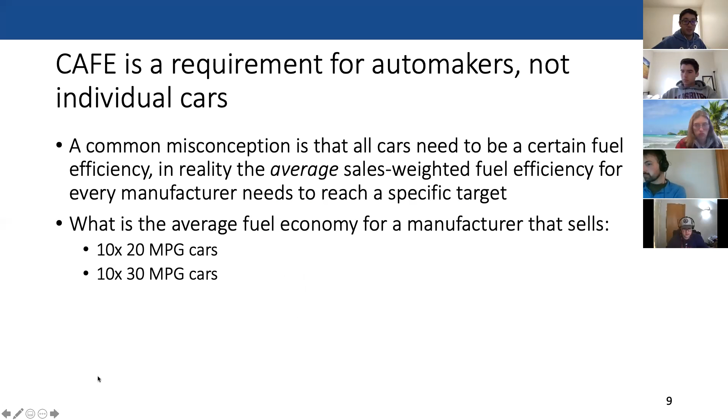Okay. So when an automaker complies with the regulation, they generate credits based on the target efficiency. Those credits can actually be banked or even traded. And so it makes some of the calculations a little bit more complex, and it makes tracking it more complex because, even if you're out of compliance, or you're over complying, that can factor into decision making processes down the line.

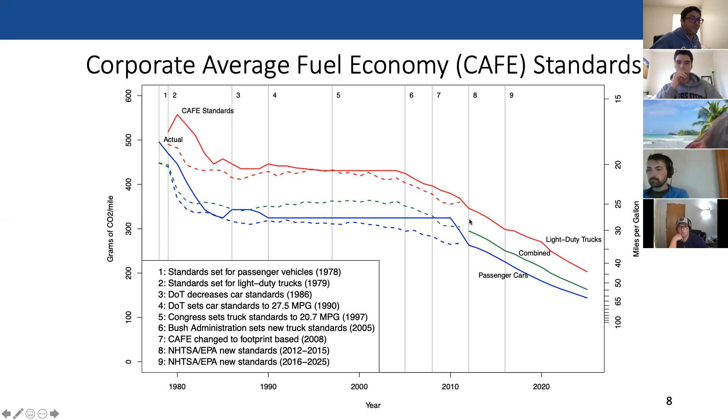And so because of that, California basically said, hey, we want to continue improving efficiencies, and this is a lot more motivated by reductions in greenhouse gas emissions. So we need to broaden our discussion a little bit to understand the historical context behind this. Cars are made by automakers that sell to multiple states, right? And so one of the tricky things is that you may run into jurisdictional issues if you're an individual state requiring specific regulations that may affect other states as well. That's usually when the federal government steps in.

But for the purposes of pollution and air quality, there's actually a pretty unique thing that happened in the past. Back in the 1970s, when the Clean Air Act was first passed by the federal government, California actually had their own Clean Air Act that preceded it, and it was more stringent than the federal rule. So at the time the Clean Air Act was made, they included a provision in section 209 that basically said, okay, we're going to let California do its own thing.

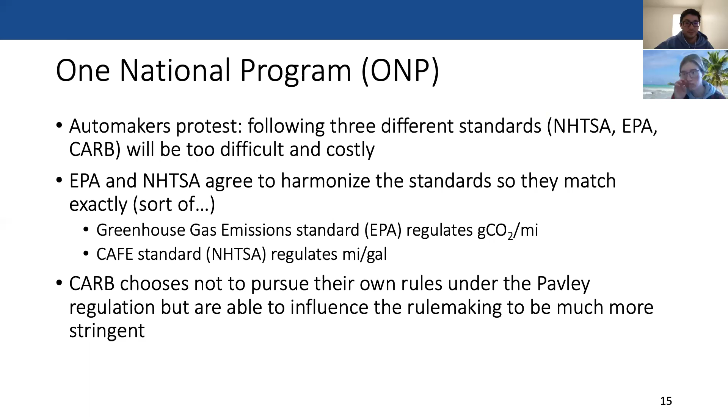In 2009, both the DOT and the EPA published this rule jointly. So the DOT rule is a continuation of the CAFE standards, and the EPA rule is called the greenhouse gas emission standards. And they are the harmonized rules for efficiency and emissions. So this was passed in 2009 through that whole rulemaking process that I was talking about before, where they proposed the rule, had a bunch of comments, and then published the final rule.

The ultimate requirements for these standards were that the average passenger car has to meet 54.5 miles per gallon by 2025. And that is based off of a 2-cycle test, which is a way of how they measure efficiency. It's not particularly accurate. So if you were to translate this 54.5 to real world, it's probably more along the lines of about 37 miles per gallon.

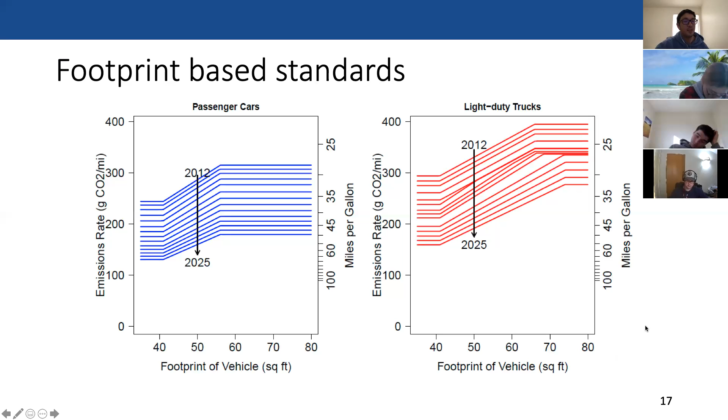Okay, and so yeah, this particular system, it's a little bit confusing, and definitely a big departure from how it was being done before. So this paper by Katie Whitefoot, who was a professor at Michigan, now at Carnegie Mellon University, was a pretty nice retroactive look at one of the unintended consequences of shifting to a footprint-based standard.

And so this was using this forecasting model in an equilibrium context that considers, on the supply side, trade-offs between footprint and production costs, and on the demand side, they use this consumer discrete choice model to see how people would prefer different vehicle sizes, fuel economy, and acceleration.

And one of the really interesting things about this is, the way that we expect automakers to comply with the regulation is just to improve fuel efficiency, right? That's what the policy is intended to do. But according to some of this work, they can make this trade-off where they say, okay, we will try and improve some of the fuel efficiency, but maybe we'll also try and make vehicles a little bit bigger. And in doing so, you don't have to improve the fuel efficiency of the vehicle as much because now your footprint is larger.

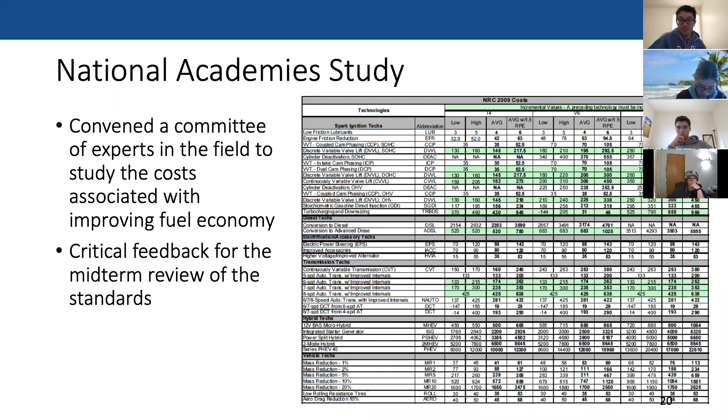And the way in which a lot of these technology costs were derived builds off a lot of the techniques that we talked about. So they have forecasting, they do a lot of financial analysis, they actually do some wedge analysis in there, different scenarios of adoption of specific technologies. They look at life cycle impacts. There's Monte Carlo simulations to think about effects and costs. And so, yeah, from a baseline of techniques that this course tries to cover, I think there's a pretty big overlap with the sorts of things that you can find in this particular study.

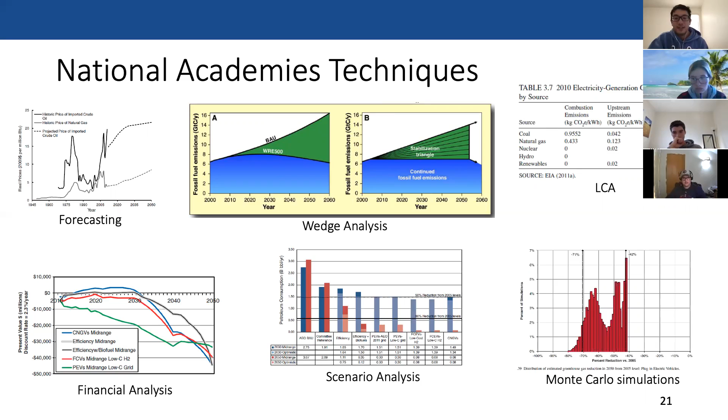One of the other interesting things that some academics looked at. So this is actually a study that I did, that was part of my dissertation, and this actually ended up getting cited in some of the newer rulemaking, and I'll talk about that in just a bit. But one of the things that we wanted to look at was how those cost numbers are impacted by interactions with other policies. And so, California has this requirement for automakers to produce some number of electric vehicles.

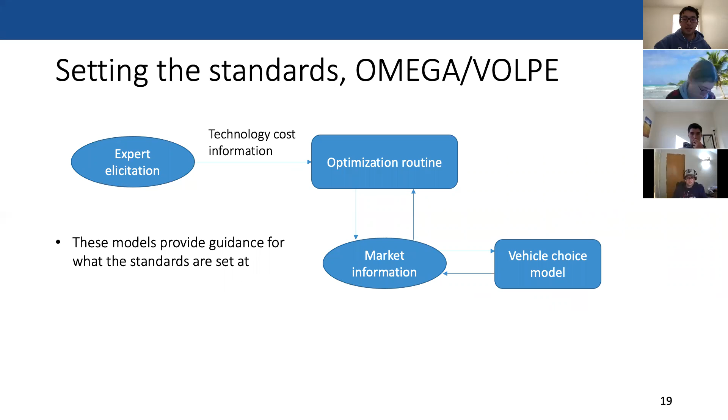When I was talking about this model, hang on, back here, the way that you meet a particular requirement is you take the least cost technology and you implement it, and you implement these technologies incrementally from lowest cost to highest cost to meet your fuel efficiency requirement. The thing about electric vehicles, though, is that they are really efficient, but from a cost efficiency perspective, they are quite high. So you're kind of jumping right to the end of the curve by forcing automakers to implement electric vehicles. So by doing that, you're actually increasing cost of compliance over what was calculated through the regulatory rulemaking procedure.

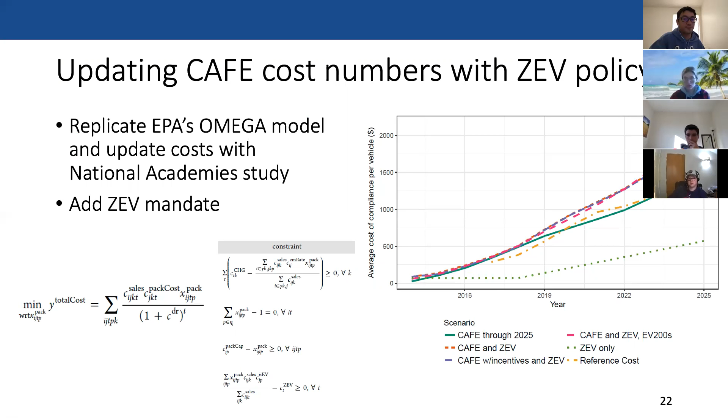One other interesting aspect of the fuel economy standards is emission rates. Remember, we now have two sets of regulations, the CAFE standards and the greenhouse gas emission standards. They are technically harmonized to be kind of the same, but that starts to fall apart when you're talking about alternative fuel vehicles. So federal regulations are harmonized between NHTSA and EPA.

But let's take a look at an example of this vehicle. You have efficiency and emissions rate, which are tied together. You have 55 miles per gallon, which corresponds to about 160 grams of CO2 per mile. These are the two things that you would measure for your standards. But let's look at the efficiency of an electric vehicle. For a Tesla Model 3, the efficiency is about 0.29 kilowatt hours per mile.

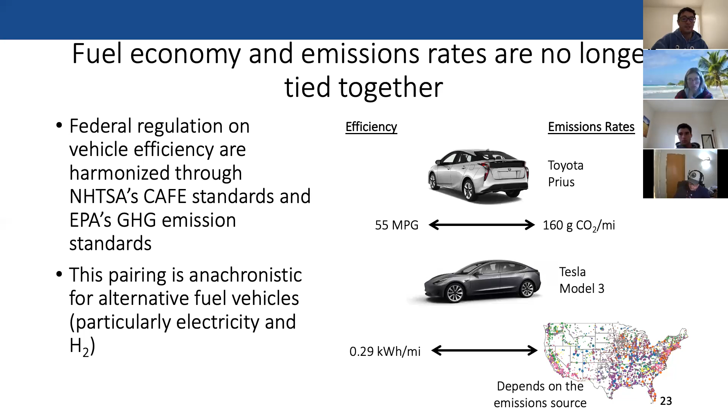And then the emissions depend on where you live, what time of the day you charge, and so on. So they are no longer tied together, and that's going to make regulation really tricky. So how is this dealt with in the standards? The short answer is it's not really accounted for. The regulation includes some incentives for alternative fuel vehicles. They're called weights and multipliers.

Weights multiplicatively affect emission rates for alternative fuel vehicles. Whatever your emissions rate is, let's say it's 100 grams of CO2 per mile, for an electric vehicle the weighting factor is 0, which just means that we're going to count it as nothing. So it doesn't matter what time of the day or where you're charging if everything gets multiplied by 0. It's kind of a shortcut for the regulatory agencies to not have to measure this.

And then they also have multipliers, which make it even more complicated. Basically, if I have a multiplier of 2, that means in the regulation, when I do the accounting, for every 1 electric car that I sell, it counts as 2 electric cars being sold for the purposes of meeting your requirements. And that is arguably a simple way of dealing with this issue, where you don't have to figure out all these upstream emissions.

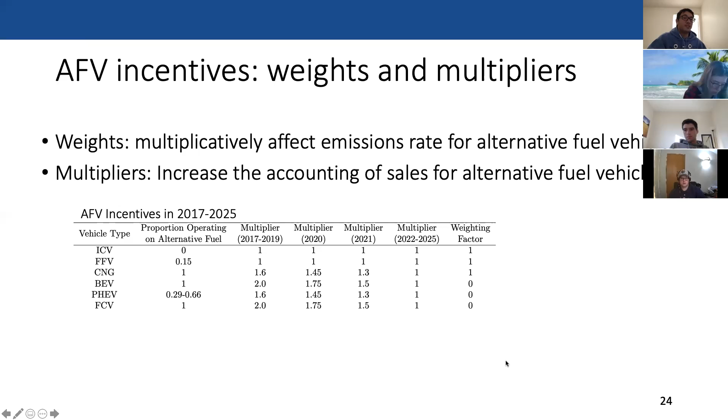So it consumes 76% more energy per mile. But according to the regulations, they are essentially the same. So there's not really any policy incentive or signal to improve efficiency in electric vehicles today.

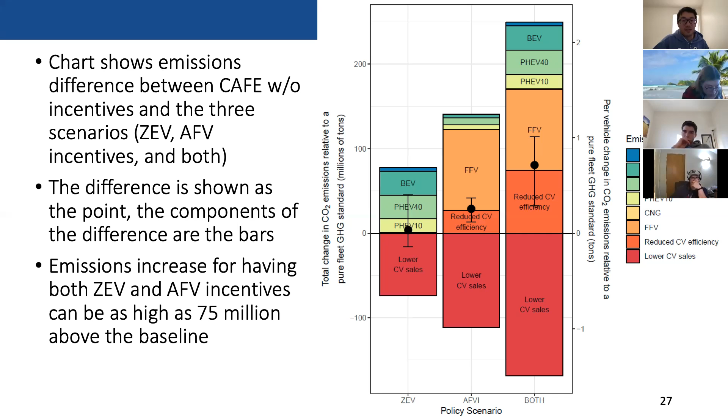Okay, but obviously in 2016, some stuff happened. Namely, Donald Trump got elected president. And so in this particular policymaking process, and some of you guys may have seen this in the news, there were some pretty interesting developments.

So remember that NHTSA is not allowed to develop rules for more than 5 years at a time. So all of that rulemaking from 2012 to 2025 was basically the structure of the rule as they saw it when it passed. But there is a requirement for the agency to undergo these midterm reviews and to modify the rules as they saw fit.

So as a reminder, that rulemaking process looks something like: first you have to announce it, then you have to propose the rule, then you have to have a public commenting period, and that was historically for the Obama era CAFE standards a period of I believe 9 months, and then you make an announcement of the final rule.

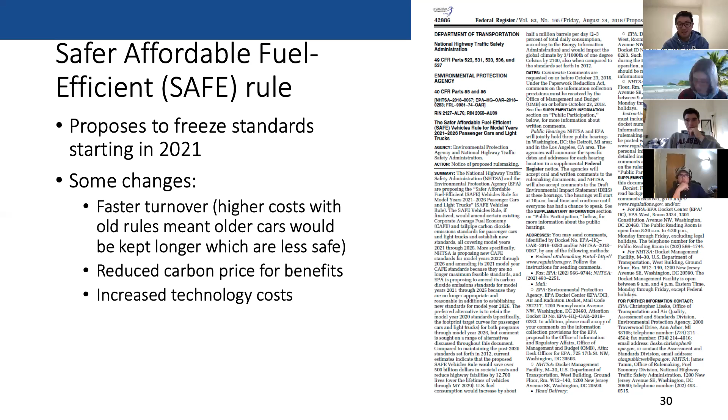Actually, I'll go back and mention that one paper that I had written looking at the policy interactions. The agencies actually ended up citing that paper as one of the reasons why costs would be higher, but it was completely misrepresenting a lot of the conclusions of our work, and so we ended up having to submit in the open commenting period a pushback against how they characterized our work.

But probably one of the more famous pieces that came out of this was published in Science, where a whole bunch of famous economists in this field came together to look at the actual costs that they were saying in the SAFE rule. And they were basically showing that a lot of the analyses were completely wrong. And this is just one example of modeling efforts to dispute what was being pushed by the Trump EPA.

And so in the rulemaking process, you have to demonstrate with a fair amount of scientific rigor why you're making certain types of decisions. And so in the open public commenting period, it's really important to get a lot of that feedback in, because it all becomes a matter of public record.